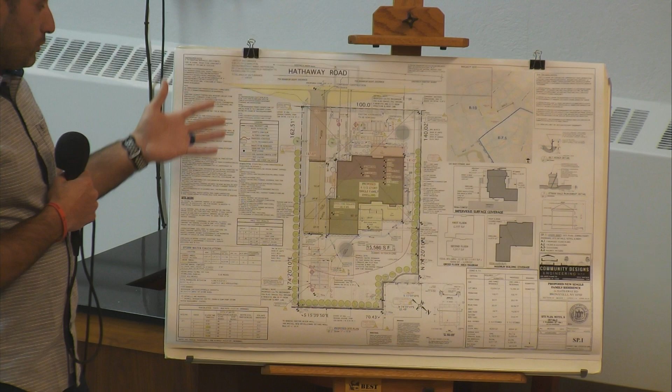There was some existing impervious surface removed on that property so it would be completely conforming to the new size of the lot. These homes are situated in the R10 zoning district, but they are oversized, just a little over 15,000 square feet each parcel, and 10 Hewitt is a little bit larger than those. As for the overall design, 26 is in the middle of 10 Hewitt and 28 Hathaway Road. I'll go to the elevation really quick. This home takes on a bit of a modern farmhouse feel, with white HardiePlank siding and white board and batten vertical on the gable in front.

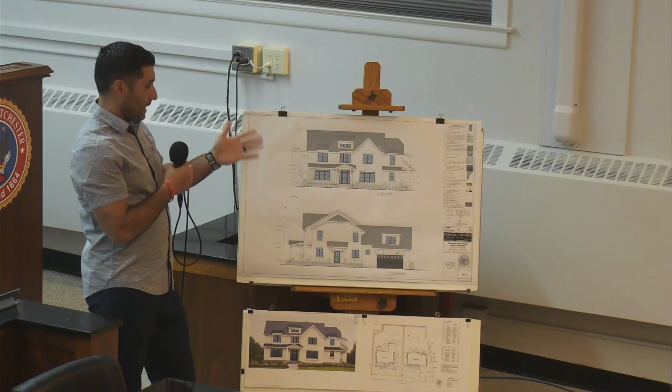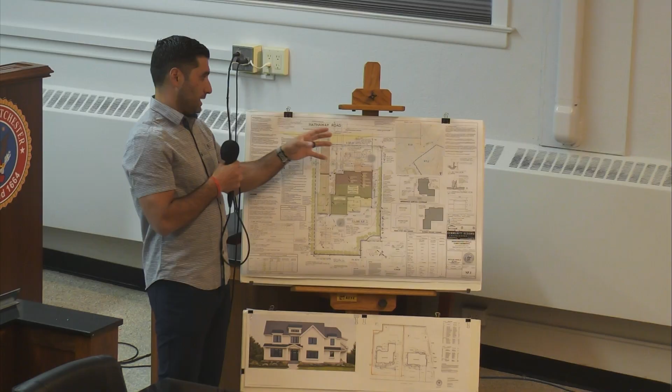In this parcel, because of the oversized lots, we were able to do something more creative. We kept the composition of the house smaller facing Hathaway Road, and shifted the house a bit longer to create a two-car garage on the side. In the middle of the house you enter a one-lane driveway, then turn left to access the garage. This also allows a greater setback from each home: the required side setback is 16 feet, but we're at about 25 feet, so each home has about 40 feet in between, creating good consistency with the streetscape so the homes aren't right up against each other.

Just to go back quickly to the finishes, pretty standard finishes as you see in the area. This one has black Andersen 400 series windows with simulated divided light, which is just a vertical divider. All of the trim is white Azek, and the roof is a pewter gray asphalt shingle roof, with some accent roofing in standing seam metal. The garage and front doors are just as depicted in the elevations.

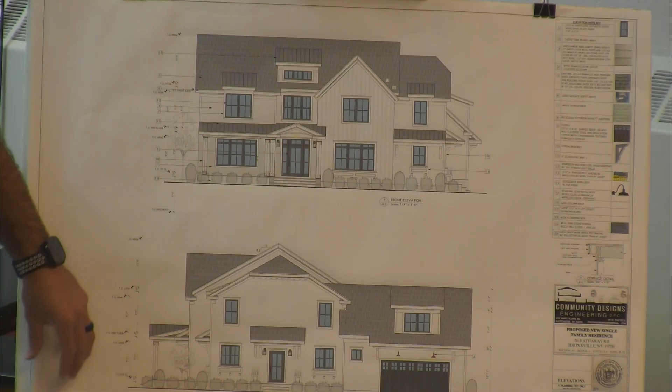As far as the side elevation, this is the left side elevation and the rear of the house. This one does have the garage come back a little bit further and has a little covered patio area with a gas fireplace for people to enjoy, a small outdoor patio, and then also a covered patio.

Back to the site plan - because this was a 3-lot subdivision, there was a whole bunch of other structures: a 3-car garage, a pool, and a pool house. With the subdivision, all of that impervious area was removed. The benefit with this project was that there was no stormwater mitigation previously for those areas, but in this case, all of our new impervious area for this house and the house next door will be captured.

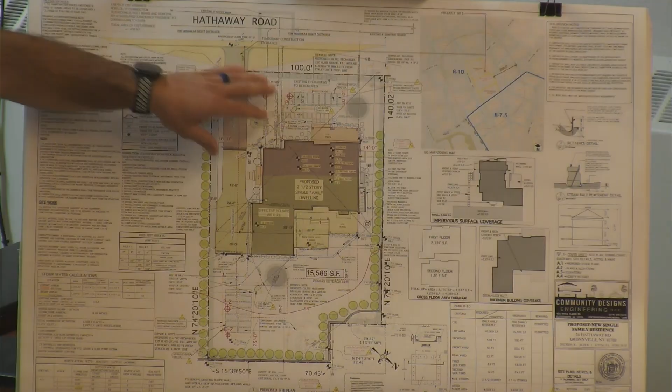We did on-site testing with our consulting engineers, percolation tests and deep tests, and we came up with plenty of room, which is nice too. We have plenty of room and area to fit our 100-year storm in the front and back for this home to mitigate all of the new impervious area.

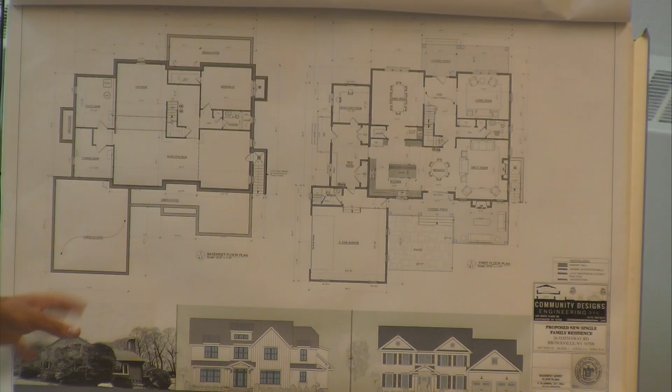As far as the streetscape on this one, this is 10 Hewitt Avenue, the right side elevation of the home - it's just a red brick home. This is our new house in the middle, which is 26, and then to the right is 28 Hathaway Road, which is the next house on the agenda, a typical center hall colonial home to the right of us.

As far as just a little rendering of what this home will look like, and then obviously with new homes there's a full landscape design. It was done by Bob Tramontano. This shows all of the new landscaping around the house, around the foundation, and also on the property lines.

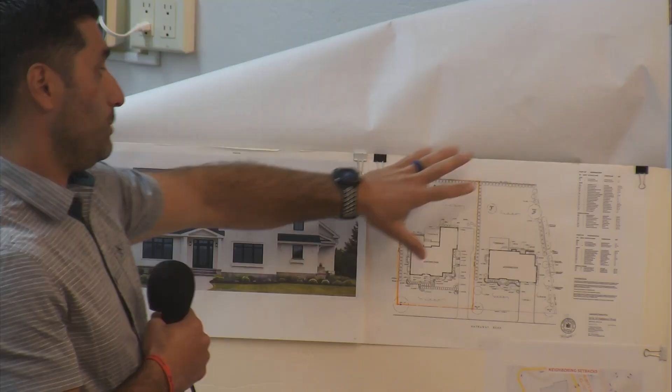There's some evergreen screening. As far as the entire parcel between 26 and 28, there are no trees to be removed. All of the existing trees we are trying to keep, trying to put drainage and everything away from the root system and foundation, so we could keep all the significant trees. The only actual trees being removed - not really trees, but in the front of this parcel there's some evergreens you see here - those are to be removed. Other than that, there's a whole lot of new landscaping that's going to take place around not just the house itself, but the property line.

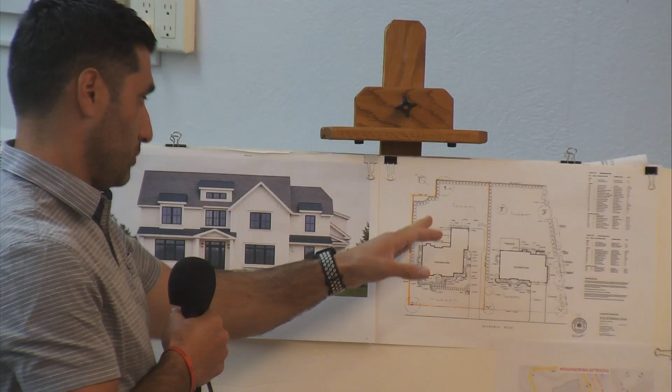In this case too, in the back of the home there is a slight slope of the property. We're going to try to raise the property just a bit, and there's an existing wall that's sort of collapsing, so there's going to be a new interlocking wall along the left side of this property, a little bit as it comes up towards almost the back of the house, and then the entire back property will be a new interlocking wall, about 4 feet max, with evergreen planting above that retaining wall.

We did go to the Architecture Review Board last month. There were no comments other than some neighboring concerns about whether these homes were going to be too close to the property line compared to the other homes next to it. So we did a streetscape study, as submitted in the packet, that shows what the other homes are compared to our homes, and it really does fit in very well.

Just to run down some of the numbers: 32 Hathaway Road has a 36-foot setback, 30 Hathaway Road has a 32-foot setback, and our house is at 37 feet, which is 28 Hathaway. This home is at 38 feet from the property, but the front porch is at the required setback of 30 feet, and the side of 10 Hewitt is at 34. So if you sum up all those numbers, it's very good consistency - one house is not much further than the other, keeping that roadway and those setbacks of the homes very consistent.

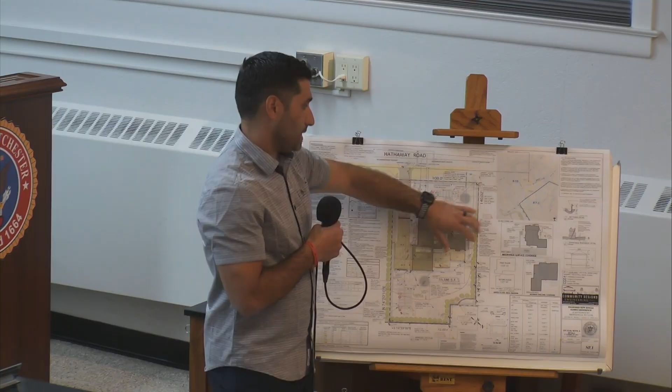When the air conditioning unit is placed, our air conditioning units are facing the new development, not the neighbor. So on this one, it's to the left-hand side, adjacent to 10 Hewitt, and then vice versa.

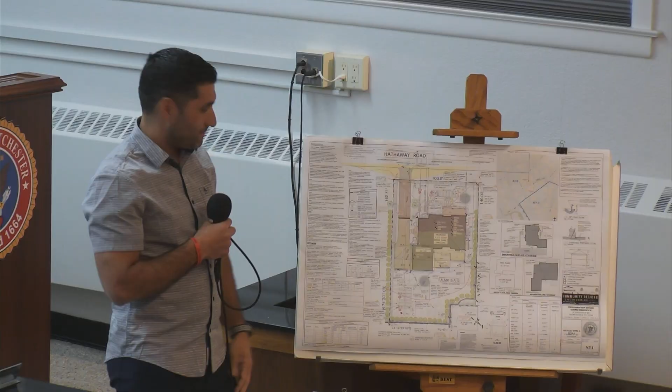You want me to jump into the other one quickly, and then we could do questions? I think it makes sense to do that. It's one subdivided parcel, and I think we'll open and close a public hearing for each application, but there may be some overlap.

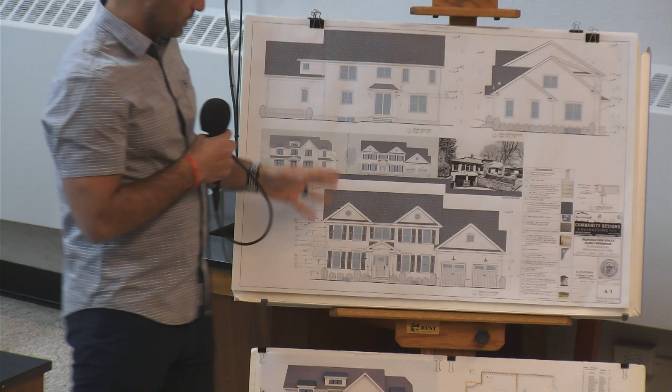So this one is 28 Hathaway Road. Again, as we mentioned, it takes on that Center Hall colonial design, and this one has the garage doors facing the front of Hathaway. As far as finishes, somewhat similar to the other house, but this one we chose to do more traditional materials.

Again, the HardiePlank, but white windows, a 6/1 grill pattern, Andersen 400 series windows. This one has a charcoal color asphalt shingle roof. Pretty basic, nothing jogging out like the other one. Pretty standard garage front door materials. There's a little bit of stone veneer on the portico, the two columns there.

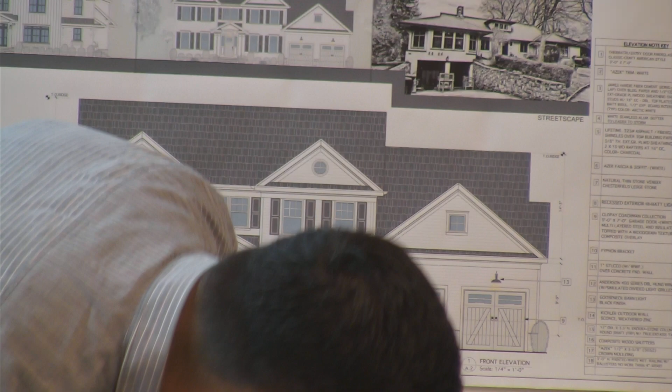Streetscape, again, this is—sorry, what is that one? 30 Hathaway Road, then 28 and 26 next to us. Obviously they're sort of crunched together to fit on the paper, but there's a good 40-foot distance between each home.

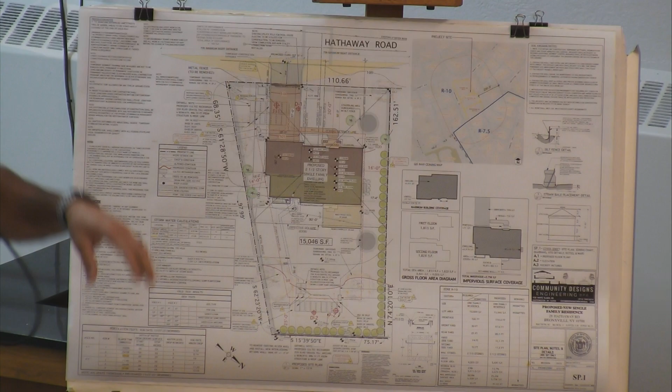As far as the homes—no, I'm talking about 30, not 28. 30, oh, yes, sorry, 30 does have the garage. Either my eyes are lying to me, or that's recessed. 30 does have a garage that goes down. You can see the stone retaining wall here.

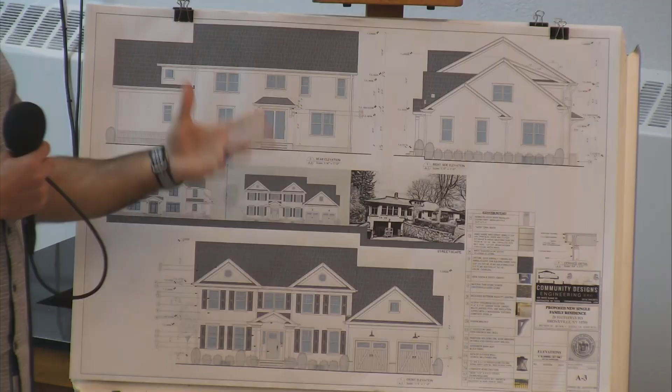Okay, got it. These homes are very, well, there's only about two steps to get into the first floor, so they're set pretty low to the ground, not a whole bunch of steps to get up to them. And overall, given the size of the property, it's a very level piece of property.

Good, and I know you were before the Architectural Review Board. Can you fill us in first on 26, what the ARB had to say, and then 28? Yeah, same for really both, it was just to try to come up with a nice site street setback, to show that the homes are consistent with one another.

Got it, I understand there were questions about that at the ARB meeting. There might have been confusion where maybe they thought the property line is the actual street line. So when you look at the site plan, you see a 30-foot setback, but that just shows where the required setback is—the house is actually at 37. It might seem like it's 37 from the street, but that's not the case because there's a good 14.5-foot buffer. But it's consistent with the other homes on that side of the street.

And was that the ARB's only comment with respect to both of them? Yeah, well more of a neighboring concern, so the ARB wanted to see that—nothing as far as the aesthetics of the home or finishes.

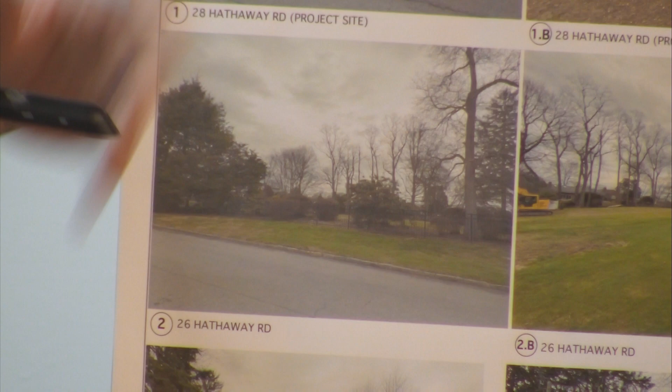So if you see this tree here, all of those trees, if you see on the landscape plan, all of this pine here, that's all to remain. None of the actual significant trees are to be removed. They're all going to remain.

And the smaller, brushier evergreens, are they going to be replaced with other plants? Show us your landscape plan. All of these circles are all of the new plants being replanted. There is a new tree being planted here in between the homes. I think that's a cherry tree.

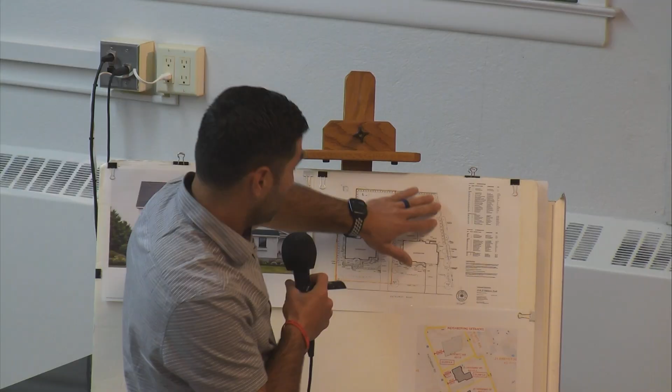And then there are also, between 28 Hathaway and 30 Hathaway, the owner's home, there's another tree—I think a pear tree that's also being planted. And then there's infill, so there's an existing 12-inch tree that will remain, another tree here. All of the trees along the property that divides 28 and 30 will remain, but they're also infilling some hydrangeas, some spruce pines, in between where there's voids of those trees.

Okay, that sounds good to me. A better picture of the... Yeah, so essentially it's a few of the—I think they consider some of these bushes—but it's a few of the plants that are here that are going to be removed.

The good doctor had a question about, which you did mention, raising a small piece of part of the property. Why don't you explain that for us?

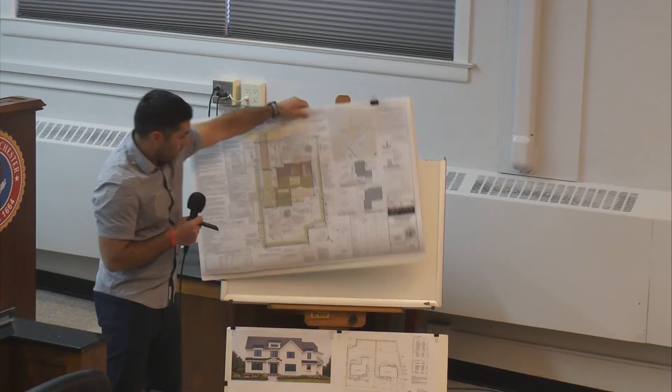That is the back corner of 26. Right here, you see this sort of red contour. So right now, the 28 contour cuts across the house here, and that basically just shifts down here so that where the property sits, it's a little more flat. So essentially, nothing really gets raised—it's only that the 28 contour gets shifted back. There's already a retaining wall at the rear of the property that spans both properties; it's just going to be rebuilt, since it's sort of collapsing and not in good shape. And in any event, your stormwater management plan accounts for exactly this, the sculpting of the property. All of that, yes.

And we were very wise about not putting the Cultec units next to these trees, and keeping them away from the root system. Again, we have plenty of room on the property so that we can do that.

Oh, this is the 12-inch tree on the corner there that you see in the picture, that remains. And I guess really it's these evergreen bushes that are being removed, essentially the only thing that's being removed as far as trees.

Just to talk about the aesthetics of the home and fitting into the character, what's good is these homes are not for a specific buyer, so it's not specific on wanting a modern glass house or something that maybe doesn't fit in. The owner's trying to make these homes appeal to a broad span of people. The people that would buy a home today look for something of this character.

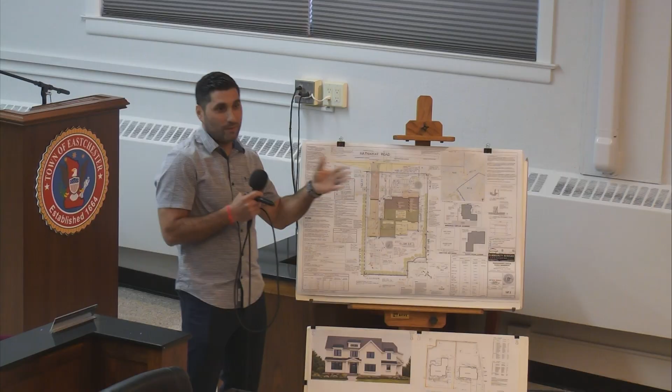Yeah, I understand the concern. But these are also homes being built in 2026, and this is what people want in 2026. They're sizable enough properties that they can hold a house of this size. And massing-wise, these homes are not out of character with some of the other homes in the area.

If you had a uniformity of a certain style of home, and you plunked these ones down right next to it, and they were completely out of character from everything else, I might have a greater consideration. But even then, I know we've permitted very modern houses at the end of a cul-de-sac when none of the neighbors complain.

But it strikes me that these two homes are of their time and place, and I suspect they'll age well because there isn't anything about them that's too esoteric. I don't think it will be a problem 15, 20 years from now. But 15, 20 years from now, they may look like a 2026 house and not a 2046 house. I don't know that there's a solution to that concern, because there isn't a prevailing model of home on this street that we can discern.

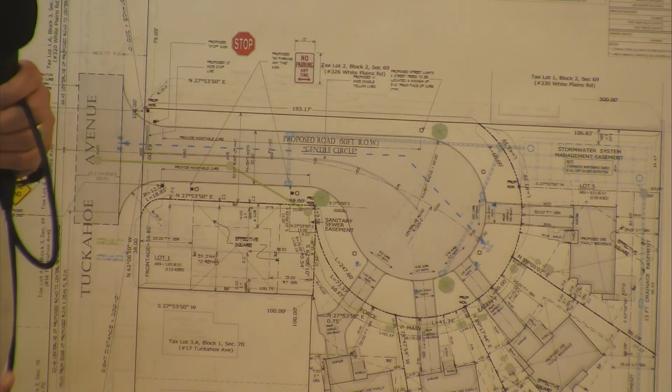A lot of what has been discussed has to do with the stormwater management system. We've made sure the system is large enough to handle the stormwater from the new roadway, and we're developing the overflow structure with the outlet to make sure we release it, because the system is designed as a detention system. So that's the largest item we've been working on.

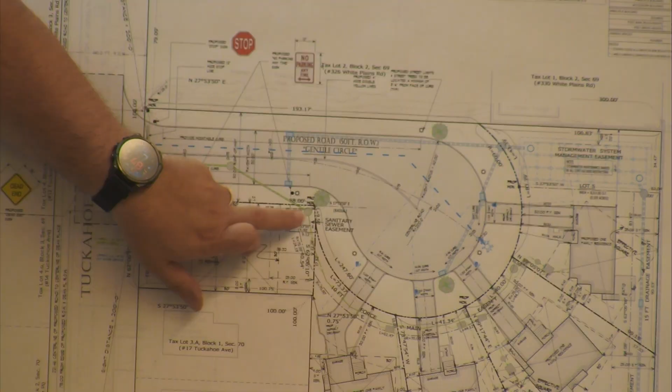As for any other changes, I don't remember if we went over this last time, but now the houses—the sewer main is a force main system up to this dead-end manhole, which is in an easement in lot number 1, and then it'll be gravity fed into Tuckahoe Avenue. We've had the existing sewer system cameraed; everything looked good. We shared it with your consultants and also gave it to DPW, and Rocco said he was fine with it as far as that's concerned.

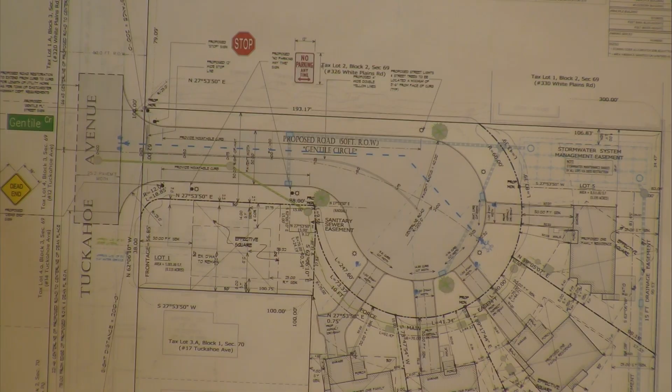Okay, give me a summary. We're proposing 4 new homes that aren't there, plus a road into the facility. There's a lot of impervious surface there. Yes, there's a lot—so currently there's an existing... Wait, let me finish my question.

Oh sorry. If you could summarize for me, where's the water going? Where is all the water going? What's going out to Tuckahoe Avenue to meet up with the sewer main, and what's happening to the water in the back of the property alongside that retaining wall? What's happening in that lower right-hand corner—I think in particular the water that had previously been traversing the adjacent properties on Duluth and Howard Avenue. I know there was a representation some months ago that there were going to be easements running that water through the neighbors' properties and onto either a Joyce Road or Howard Avenue system, and I thought that was now not the case, but it still is, I think, on plan sheet C104.

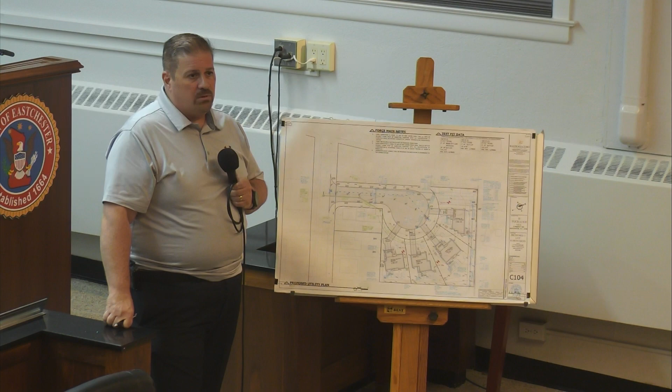Our release of water into that system is lower than what's currently there now. So we're actually making it better because we're putting out less water. How much less, what percentage lower? I'd have to go back through the numbers, but I think it was roughly a 20% reduction—I don't want to quote anything exactly, but it is less than what's there now. Well, you're not making it worse. That's good, but we've got to make it better, not worse.

Everything we've done with this whole subdivision, even as far as grading, we're trying not to affect the neighbors. We're trying to make everybody safe—not even happy, just safe. We don't want any phone calls about somebody getting flooded or having water issues. We're trying to fix everything that's there and build this project so we're actually making it better for the neighborhood and creating value for everybody.

I'm definitely going to have to hear from Mr. Bolander on this, because I understand what the goal is, and I see the water retention on each property as at least a partial fix to the problem, and that's the way it's done. There aren't an infinite number of tricks up your sleeve.

The simple reality is we're taking a largely undeveloped property and developing it quite aggressively—there's quite a bit of impervious surface being created, and it's not the easiest of properties. That shopping center made it a difficult piece, and we've already heard from neighbors about the difficulty with flooding. I won't comment on whether those neighbors should be more interested in making sure a proper, larger, or better pipe is allowed over their properties. I think that was at one point going to be the solution here, and for whatever reason that no longer appears to be the solution.

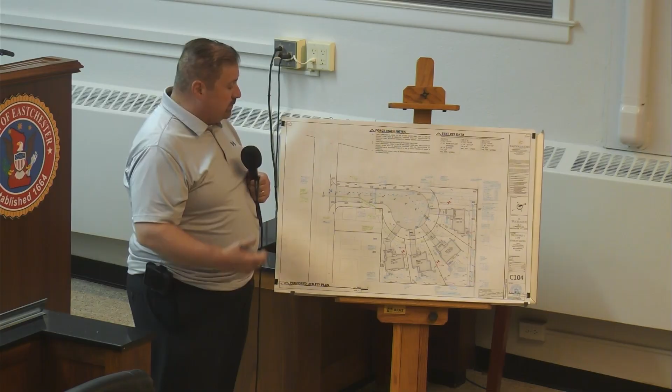A little bit in relation to what you said, the neighboring property at 17 Tuckahoe has always been supportive of our project and of trying to find a fix to upgrade the piping. But the people at the last property that tied into Howard got a little nervous, which you can't blame them, it's their property. That stopped the replacement and upgrading of those pipes, which could have helped relieve even more of the water out there. But everything we're working on together with Rick is making sure that what's going on now will be a reduction of what's currently there, so we don't have any negative impacts on the neighbors.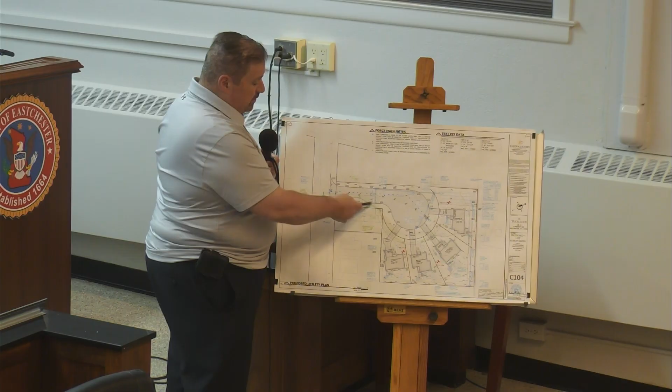Remind me, what if anything is going into the Tuckahoe Avenue town sewage system, the pipes there? Is it just the sanitary sewer? Each of the houses has a sewer ejector pump that pumps up to this manhole and gravitates into the existing sewer. Got it. And it actually dead ends right here, the sewer. So the stormwater is retained on the property?

Right. And we haven't heard anything from the owner of 23 Tuckahoe Avenue either way about this application. I believe three years ago, she's actually the one who alerted us that there were pipes there, the whole history of when the shopping center was built, the flooding condition, and how the town came in and alleviated the flooding. That's how we were able to find all the pipes and all the basins.

All right, again, anything? All right, let's hear from Mr. Bolander. Good evening, Rick Bolander, CJ Consulting.

There has been quite a bit of back and forth finalizing the stormwater design between our office and the applicant, and we have made progress, but it's still not a finished product. We're still working out some kinks, mainly towards the larger system collecting runoff from the driveway in the cul-de-sac. We're comfortable with each lot's system, the soils allow for infiltration, we were out there for the soils testing and they look good. But the larger system is in a fill area, so infiltration isn't allowed, so we had to go to detention. What's left in the design is mainly the outlet control structure, because we're showing the line from the larger system down to the corner of the property to be improved, but that's still going into a system that isn't in the best condition. So the goal is to reduce the flows as much as possible.

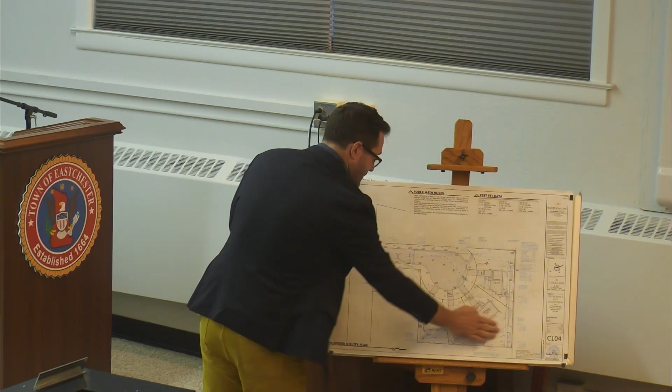Another requirement of ours, to further safeguard the neighbors from water inundation, was a swale along this property line, just to make sure nothing was sheet flowing off-site. It will be collected in a controlled manner and included into the improved system right there. So the swale rises up so the water doesn't flow over? Correct, it'll collect whatever runoff is from these sites and direct it into that system. Again, not a finished product, but we've made progress.

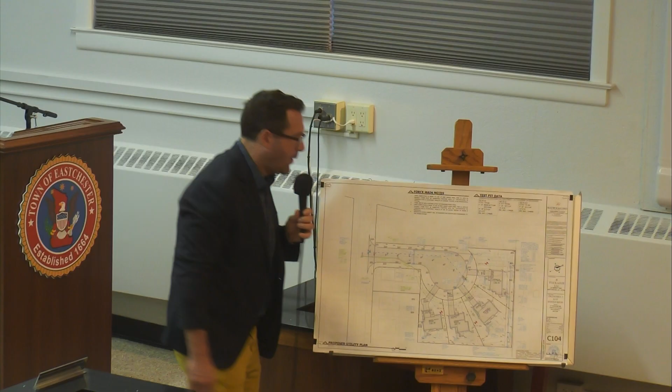Is there underground water flow here though? Groundwater is at 2 to 11 in this area. The bottom of this system is set 2 feet as a New York State requirement, you need 2 feet of separation between the bottom of your system and groundwater, and that's for an infiltration system. Detention, you don't need that separation because you're not worried about water coming back up into the system. So the separation is still there, but because it's in fill soil, infiltration was not allowed.

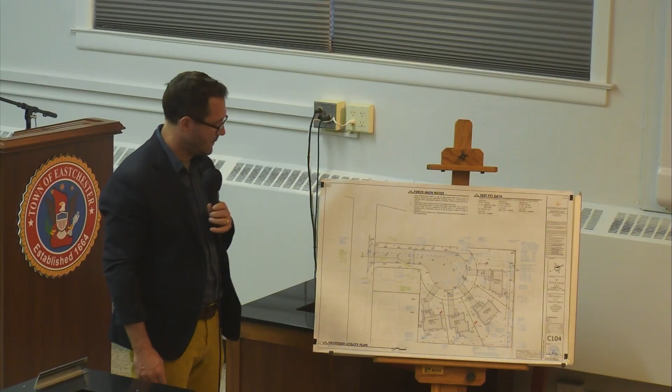So, again, to my question about the pipes along the right side of the rendering here, as best we can tell, these are not in good shape. How are they going to function?

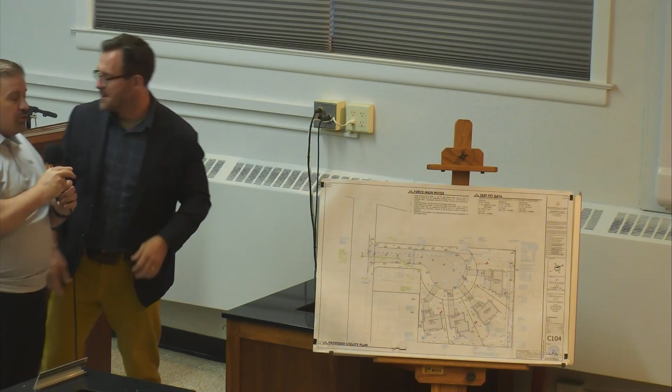Yeah, thanks. So that system, and this was before Rick was on the project, we went out there with Joe Tramelli and Rocco, got the camera. We ran a camera from Howard all the way up. Those pipes are clean and in very good condition.

The stormwater pipes going through those people's lawns, they're in very good condition. We ran, Rocco brought the camera out, we went and looked at it, and they were actually in very good condition. They weren't broken, there was no sign of deterioration, none of that.

They're shallow. That's the only real issue with the system, is they're shallow and the pipes are a little undersized according to code and also practical engineering. But the actual condition of the pipes is very good.

Right, and that's documented someplace? I believe so, yeah, I believe Rocco has all that. I think Joe has a copy of it. Yeah, I think I might have some photographs as well. I'll dig them up and send them over to everybody.

I'm sorry, I didn't want to interrupt, I just wanted to bring that point up. That's fine. How does the size of what you're proposing compare with what's there?

Same size, same size, yes. And I'll confirm the condition of those pipes with the office.

Okay, because I guess I was under the impression from multiple hearings we've had that they were not in the best of condition, and maybe I conflated them being undersized with them being in poor condition, but again, I'd like clarity on that point. And I had that impression as well, but I would like to confirm that now, just to be sure.

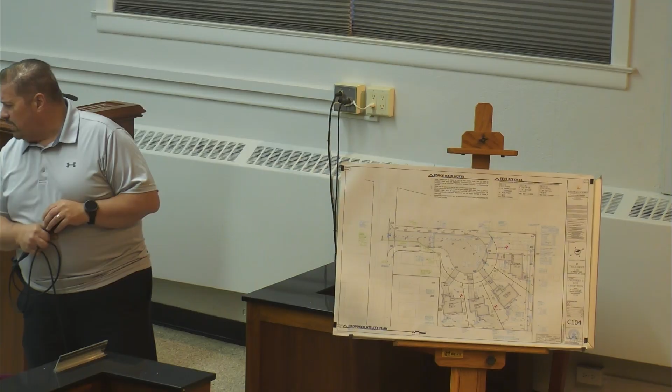Yeah, we can't rely on the contractor to do that, though. An owner has to be responsible for being the point person on that. Basically, that owner's going to then have to pass the hat, right? In terms of cost, yes, that is what has to be worked out - who will be responsible and the mechanism for billing back the other lots.

Is that something, Noel, that we have in other areas of the town? And if so, how do we work around that? Or has it worked? Most often, with subdivisions that have common improvements like this, an HOA will be formed. The HOA will own the improvements, and then it will be responsible for maintenance. Here, the election is not to pursue an HOA, which is okay given a subdivision of this size. It could be hard to fill a board and manage things, but in the absence of that entity there to own and maintain the improvements, there has to be an adequate alternative.

Just out of curiosity, couldn't the town send out a letter saying hey, it's time to check your system? That's not really the town's DPW responsibility - it's going to be the responsibility of these lot owners. No, I know, I'm just thinking out loud. Yeah, it becomes a policing issue again. In terms of enforcement, it definitely is an issue. Enforcement - policing is my word for enforcement.

And it sounds like maintenance is going to be very important, because if I'm understanding it right, the crux of this is going to be how fast water will leave this site, and if it's not maintained properly and it doesn't work exactly as designed, it's going to be a huge issue.

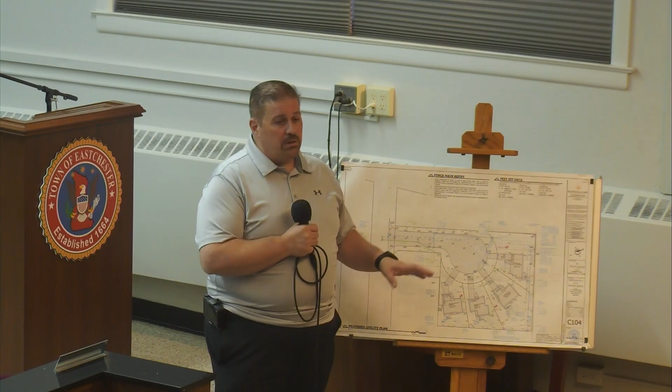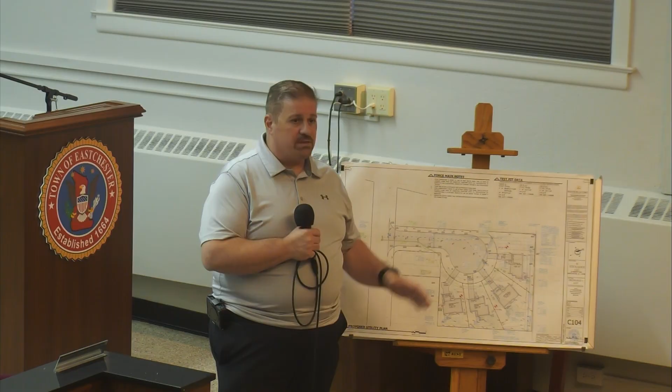However, that stormwater infrastructure is not in good condition. That was one of the long discussions we had with Rocco and with Joe, before Rick. And that whole system has to be fixed. The only other place to tie in was like 1,000 feet down the road on Tuckahoe. So I guess none of those other properties have anything like you were suggesting? I don't know the history of those, so I'd have to go look and see how stormwater was handled and what the regulations for stormwater management were at the time they were developed. Those are dating back to, I think, the 60s when those subdivisions were done, and there was no stormwater laws like we have nowadays.

The country market could... is that the property that was causing this, the country market? Yeah, the shopping center, sorry. Excuse me.

Back to you, Mr. Bolander. What's still outstanding on this? So it's essentially the detailing, the design of this. We've made progress in the last week. Been quite a bit of back and forth, but that still needs to be finalized.

As I mentioned, we're comfortable with each individual lot stormwater mitigation, but it's the driveway and the larger system. I also want confirmation regarding the pipes in the, I guess, northeast corner of the property, the ones that go out into Howard, that those are in fact in reasonably good shape, and despite the fact that they're undersized, that they would in fact perform the function they're being burdened with at the moment. That's an open question that I do need an answer to.

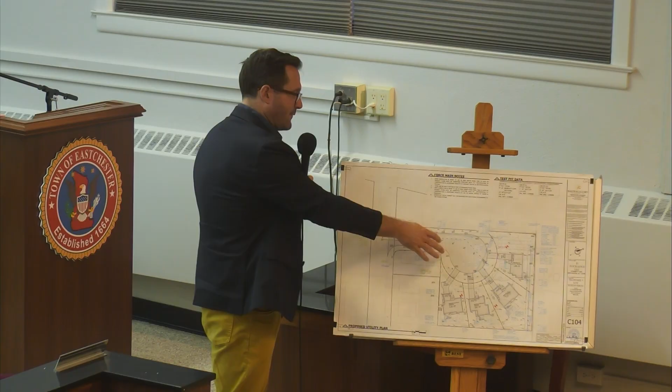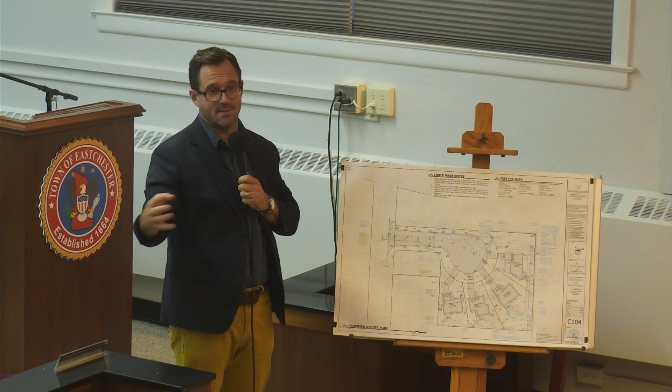Each individual stormwater mitigation system on the lot will use infiltration, so that water will go back into the ground. Because of the location of the larger system that's collecting the driveway and the cul-de-sac, they weren't allowed to infiltrate. So that water is held in that system and slowly released through the improved pipes, which will eventually connect into that system on the neighboring property.

That'll go through to Howard Avenue, correct, but assuming we have a functional system there. Yes. At this point, we don't know how much or at what rate the water is leaving through those pipes. We do not know yet.

And it obviously depends on how heavy the rains we get, and all of it, because if we have a relative dry season, it's not going to be a problem.

So, understanding that it's still in the works, do you believe that so long as the system is large enough, it will create a solution? It just depends on how large that system is for detention. That's to be determined, and that's what we're working through right now. Make a bigger detention tank, or an even bigger detention tank, and eventually you'll get to a solution. It might just be a cost factor for the tank itself.

Correct. And all of the sanitary is going out into Tuckahoe Avenue, just the sanitary. All of the stormwater is being either retained, percolated in the ground, or conveyed towards Howard. That's right, that's right.

So all of it is staying on the property, at least initially, and the detained portion is ideally going to, if it reaches... well, I guess it will always be pushed off of the property onto Howard in an ideal situation. You don't want it just sitting there indefinitely, correct? Absolutely. So we need to make sure that part of the system is functioning.

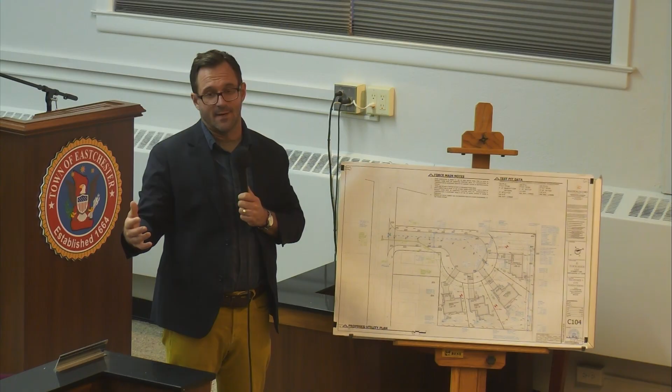And that's another important thing to keep in mind too, not only the maintenance of that system, but the maintenance of the inlets and the pipes as well, because you get a storm on a fall day and those leaves collect on those inlets and essentially render those inlets useless. So that has to be addressed as well. Not only the underground systems, but the above ground system is almost more important than the underground system.

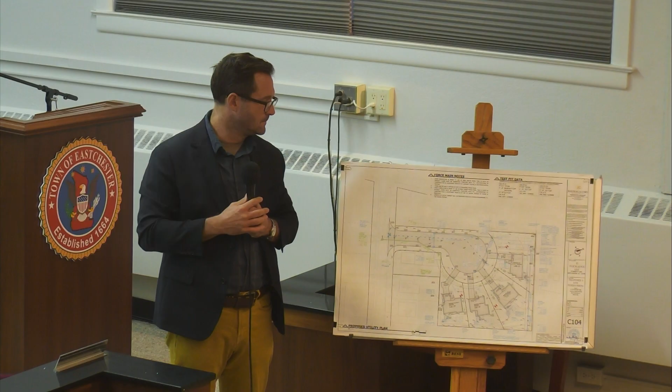And in the ordinary course, who would maintain them? The homeowner, right? But here you have multiple homeowners. Yeah, okay. But that's a very important part of this, the maintenance.

Master Giacomo, do we have any document that memorializes how the owner of the property adjacent to the detention system is going to be responsible, in the first instance, for the costs of maintaining that unit, with the understanding that those costs are supposed to be shared equally by all four owners of the new construction buildings? How is that going to be documented so we're not just working on an honor system?

Well, I believe that's part of the maintenance agreement, that's part of the easement. The maintenance agreement has got to be part of the easement, which is part of the deed of the property, so it's all there. When the title company pulls everything up, they're going to see there's a restriction on the property. What's the restriction? Oh, there's an easement. What is part of it? And it should all tie together. And at what point do we see that?

We would like to have that as soon as possible so we could start to review it. It will have to be submitted for recording when the plat is submitted for filing. So that happens contemporaneously, but the sooner we could start reviewing that information so we could understand the maintenance, the better. I believe you and Jacob have reviewed it already.

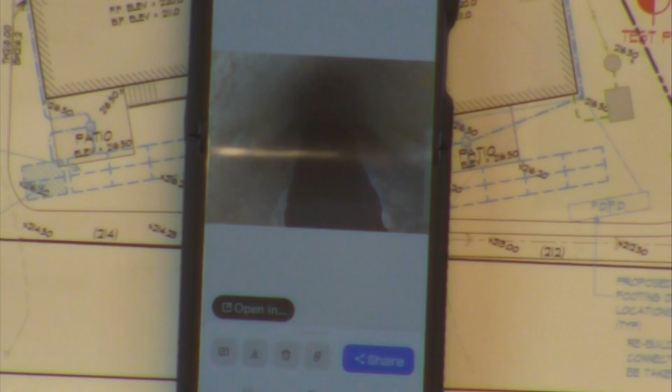We're going to hold the public hearing now. Right, the public hearing is open, so we'll keep it open to public comment. We already have the public hearing open, but I make a motion to hear from the public. Second. All in favor? Aye. Anyone here to comment on application 21-1715 Tuckahoe Avenue subdivision? Not hearing anyone. All right, we're going to keep this open.

But I guess, what was the original objective, since this is still an application for preliminary subdivision? Obviously, there's still open items related to it, so what's the objective that you guys are looking to? We're looking to try to move this along. I know there's a little bit more to do with Rick, I think we're very close, as Rick said. And then we want to try to start getting to the health department to get their blessing on everything. Got it. Because we can't come back to you to get final or anything like that without the health department reviewing it. That's right.

I've had a lot of conversations with Veolia Water. They seem okay with everything. They actually upgraded the water line on Tuckahoe Avenue, and it's actually on our side of the street, so we don't have to cross the street to tie in. Makes it easier for us. As far as the sewer, again, it's been TV'd, and we've spoken to Rocco at DPW, and he's okay with everything. So we kind of have everybody other than the county saying you're good. And of course, with Rick, we just have those little things.

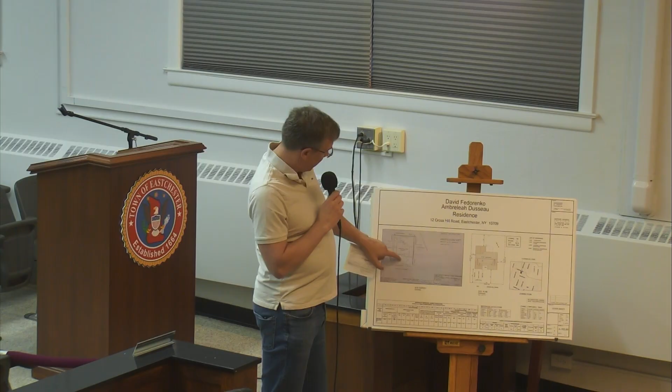That being said, with the site plan, there's not going to be any changes, and no variances required. We're going to stay within the same footprint of the current site. You can see here in red, essentially the two dormers versus what's going to happen in front — it's just a pop out here, keeping it straight. There was already a bathroom on this side that was never finished. It was approved in plans in 1999, says future bathroom, but it's already plumbed and electric and ready to go. So that's essentially good for us, it's less work on our end.

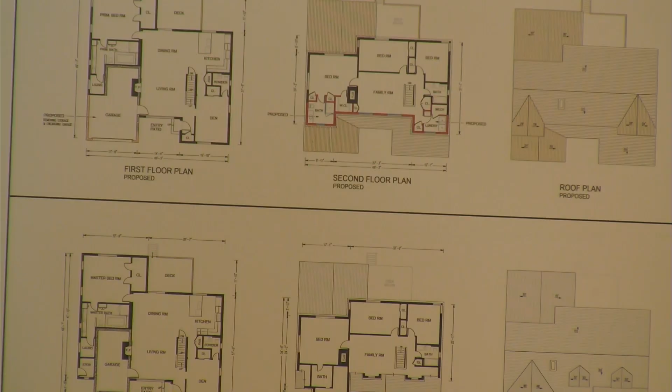As far as the house goes, this is the current elevation — small garage door, two dormers. Essentially, we're going to widen the garage door, put two large windows in the front. This would be something like a family room on the second floor, and then there'll be a laundry over here, and then again, that's the bathroom we talked about. The sides and the back are not even an issue here. I don't like how the rendering looks, but it's going to look better in person.

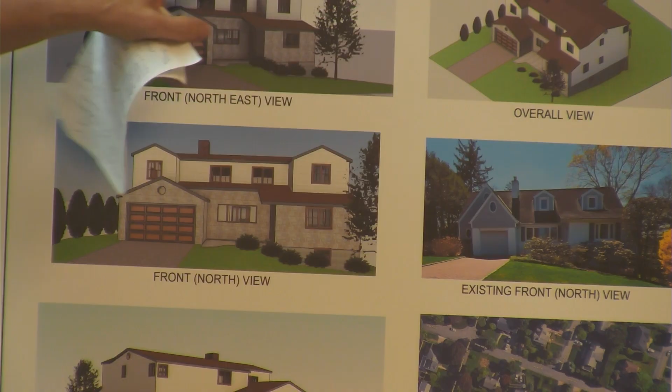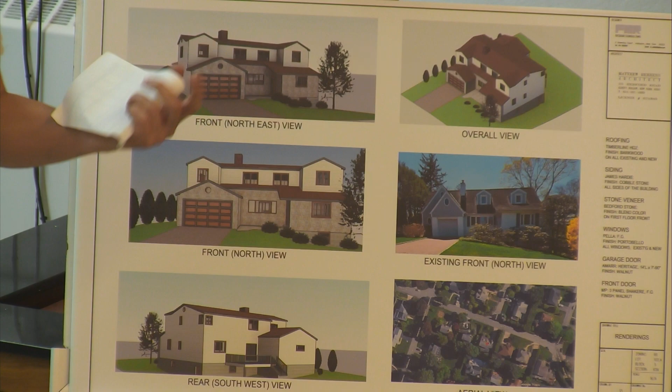That's the current house there. The roof is extremely old. I got to meet some of the neighbors, my neighbor to the west. They've been there for over 35 years, and they said the siding's never been changed on the house. The roof itself is also leaking, so when we had that rain, we had to put a bucket underneath. We're working on a permit currently for interior work, and this will be an amendment to that job.

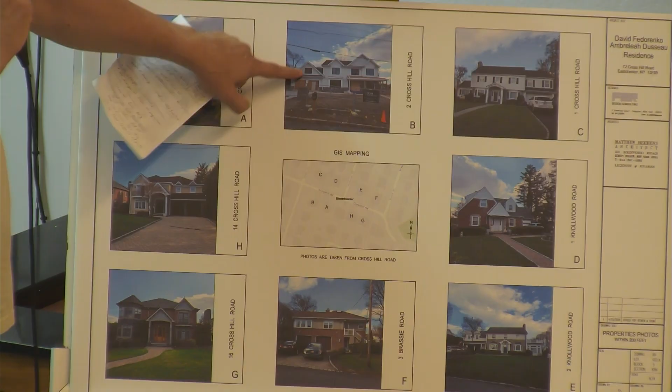And then to current homes in the neighborhood, where are we? We're right here, and then under construction 2 doors down is a much larger home. Our home will be similar to this type of front, so 2 Knollwood and 1 Cross Hill.

We're using standard Pella Lifestyle windows, all casement with grills in the front. Cobblestone colored Hardie siding with Monterey taupe type trims, different variations of 6 and 4 inch. And the GAF Barkwood shingles and Bedford stone veneer in the Liberty style for that.

The good news is, since it needs a lot of love, it's going to be fully undressed, and we're going to put new house wrap and 1 inch insulation board to add an R value of 6. And the doors and garage will be more of a walnut type color to give a little contrast.

Again, there's no variances needed for this particular job, and no changes to the stormwater system at all—it's all existing. No changes for the setbacks, and we're not removing any trees or vegetation.

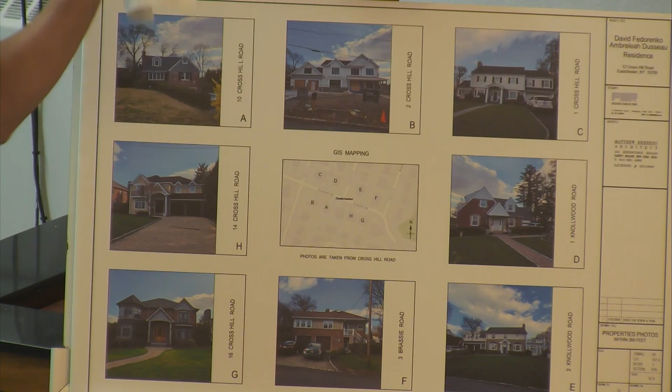Everything stays as is. And we did have a comment from the ARB last time. I think it was more because of how the drawing looked, with all the blacks and grays mixing in. But we're fully aware, and we want casements with grills, which is what they suggested.

Any questions? Just wanted to confirm, I see in the application that the gross floor area, the square footage, has actually gone down from 2336 to 2321. How did you remove 15 square feet?

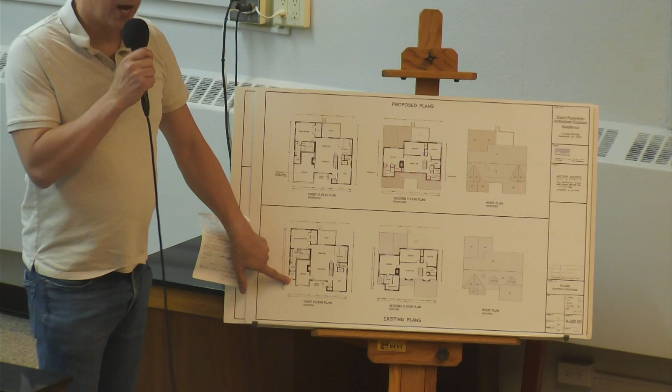Correct. So what happened is, let me see if I can give you a visual. Here's a better picture. This helps. So we lose some square footage. This is the second floor. Here's the first floor, right here where the garage is at, which was very narrow. Here is actually storage connected to the house, and that gets removed because it becomes garage space. Got it, so that's how you end up losing that square footage. Yeah, okay, correct, got it.

But there's no change in impervious surface on the property. Impervious means? Meaning that you're not increasing the amount of concrete or asphalt. Correct, yes. So no additional concrete, in simplest terms. Yes. So you're not losing grass either. Correct.

All right, yeah, and I believe that if what I'm reading is correct, the permitted square footage is actually lower than what they have, but since they were already non-conforming and they're reducing the degree, they don't have to go to the zoning board. Correct. Yeah, okay, that's good.

And the height of the building, the ridge line—no change, remains the same? Yeah. Okay, yeah, this is pretty straightforward.

No, I like it. I think it's a very nice renovation, and one that's going to make life on the second floor a whole lot better, I think. Yes, absolutely. So I have no further questions.

Anyone on the board have questions? Otherwise, I'm going to open it up for a public hearing.

No detention tank, right? I'm sorry? No, I'm just kidding. We were talking about detention tanks, so I just want to make sure we don't have to talk about it here.

Not at all. I will say that the town has recently amended the standards for site plan approval related to stormwater management for all types of lots. It's a minor tweak from what was previously existing, so it's not substantially different, but it is new. So I do have a standard condition moving forward about stormwater management, which I could read into the record at the appropriate time.

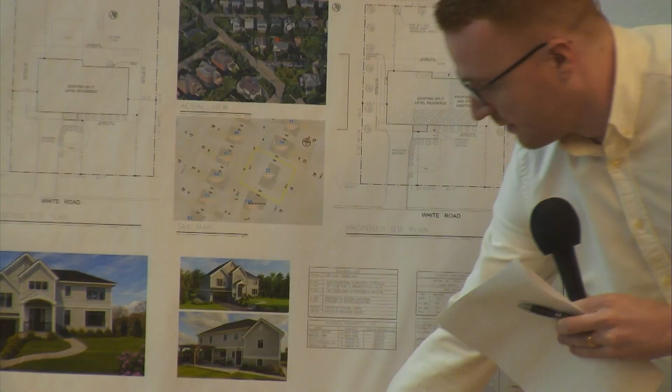The existing house right now has a very low roof on the front and has a partial second floor on the back. As you can see here, I'm going to go through the floor plans a bit.

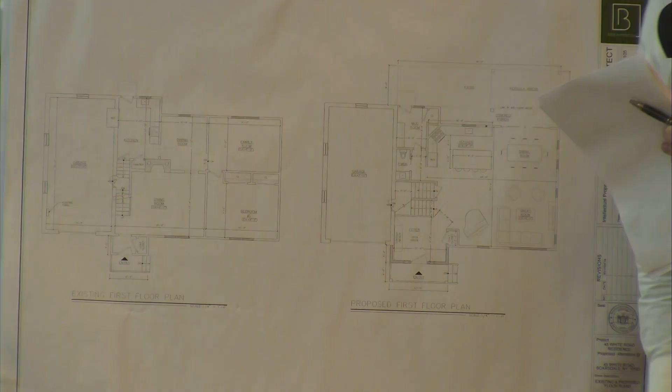On the existing first floor plan, we have a small living room, a typical small kitchen that hasn't been renovated in a very long time, a family room, and one bedroom. The house also has a one-car garage next to it, and we're proposing to open up the whole space on the first floor and put all the bedrooms upstairs.

Over the existing garage right now, we have 2 bedrooms that share 1 bathroom in the middle, but we're proposing to turn that into the primary bedroom, with a spacious walk-in closet and bathroom. We're moving the other 3 bedrooms to the other side, where each bedroom will receive 1 bathroom, and we're also adding a new laundry for the second floor.

We do not have a stair to the attic because we don't really need it. The house also has an existing partial basement, which I'm going to show right now, which also has a bathroom, so we're just going to keep it as is and clean it up and open up the space for it.

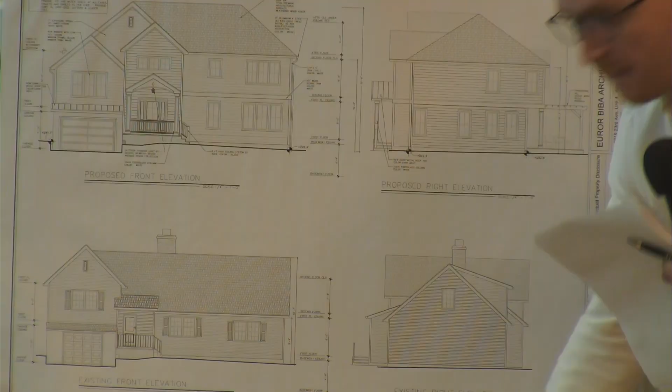I have a question regarding the elevation and the application itself, which goes to the square footage as well. I know my notes for this application indicate that no variance is required, but I'm seeing the gross floor area of the existing is 1718, and the proposed is 2977.

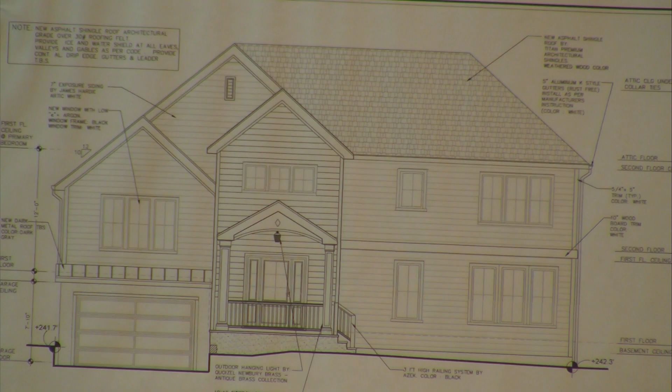I have to say, if this is your handwriting, you gotta go back to school. It could pass as a 9 or a 4. The good news is, I was reading into a problem that doesn't exist, because I was seeing a 9 and it's a 4. So you can disregard that, you're within the limits. I was just curious as to why it was not requiring a variance, and wanted to clarify that.

Speaking of the front elevation here, we're continuing the same roof line on the left side of the house, and following up to create this area, which is where there's going to be the two-story foyer, an open-up space.

For materials, we're going to have architectural shingles in weathered wood, James Hardie siding, black windows with white trim on the outside, and white Azek trim typical. We're also going to have a metal roof, replacing the existing asphalt shingle roof with metal. So that's pretty much it.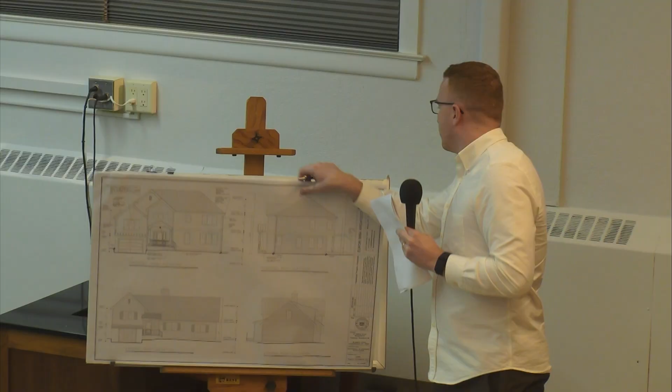Thank you. What was that driveway that we saw before in the before photo? Could you go to the existing photo, I guess I would call it. Yeah, this is the existing driveway.

And what's that in the lower left photo? Well, this is a tree which is hitting the foundation right now, so we're going to remove that tree. We're also providing screening all over the property line, like giant arborvitae, but we definitely need to replace this tree because it's hitting the foundation.

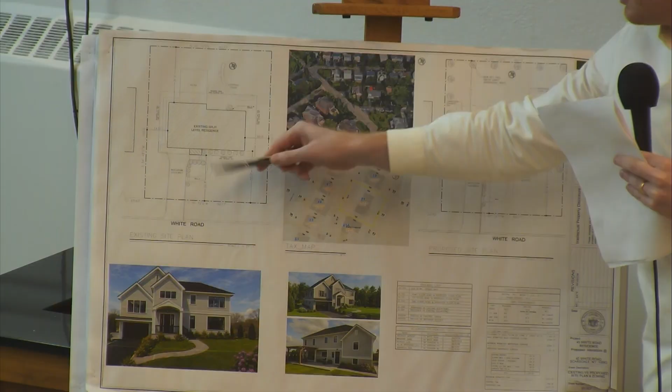Understood. What is in the area down here, again of the four photographs, the one in the lower left quadrant? Is that concrete? Yes, it's concrete that we're basically taking out. This existing portion was like a patio, must have been some sort of fire pit there in the middle, but we're going to relocate it and turn that into green grass, basically.

Got it, okay, because that was sort of a patio, is that what that was? I think so. When I was there, I couldn't tell much. I think it had a fire pit on it from the photos, so it was being used somehow, or there must have been a small tree, but that's the situation I found when I took the photos.

All right, well, we were in front of the architecture review board and did not receive any comments from them. We got one comment from the public, and their question was basically about the left side, asking if we're adding any more windows to what we have right now. So I can show the elevation as well, existing and proposed.

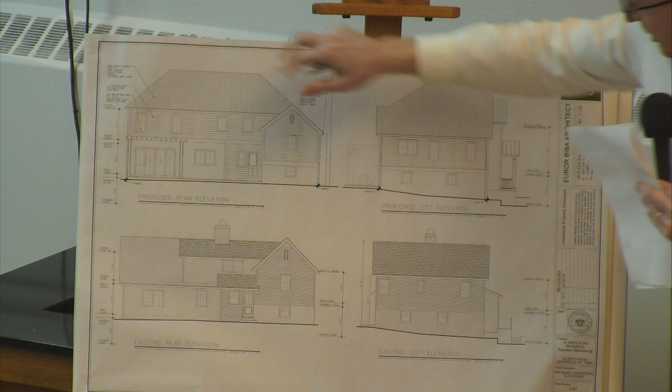So we're talking about this side, the left side, where the neighbor, so the existing, does have 3 windows on the second floor over the garage and 2 windows in the garage. We're basically just relocating the 3 upper windows to fit a bed between the 2 windows. And this is the new master bathroom window, which is pretty much the same window size, just pushing them left and right a little bit to accommodate the new floor plan.

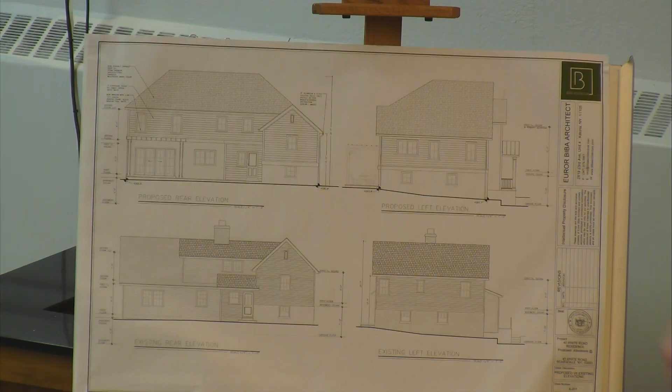Yeah, it's fair, I don't have an issue with that. But other than that, I mean, they were okay. Good, good. Any other questions from this board?

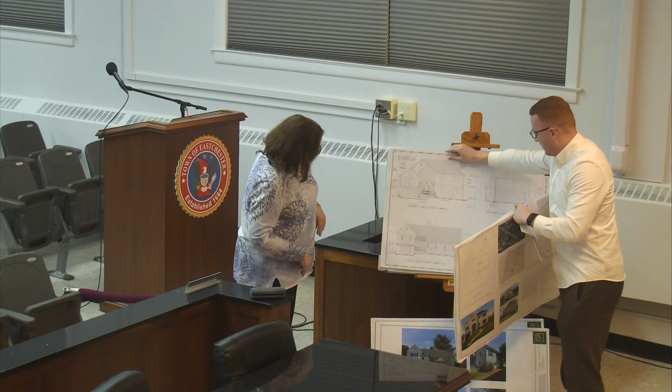So the gable. Just if you could grab the microphone so it all goes on the record. So the height of the roof, our highest point so far is at 30.5 feet, which from the allowed, which is 33, so we're well under the part.

Is it an increase of what the existing is? Just out of, highest point - yes, it is an increase because we're adding a full second floor, so definitely it's an increase, but still within the zoning requirements.

And is this continuous, or is there a separation between the top of this gable? Excuse me ma'am, if you could take the microphone when you're asking a question, because the court reporter is going to want to get this down. Yeah, I just wanted to know if this border to this gable and this gable, are they adjacent?

So what we're trying to do, we're keeping this part. We're obviously going to change the roof and put insulation and everything, maybe new rafters, but we're keeping the same pitch. This is continuing here, and it's going to meet the same pitch on the other side of the house, so we can keep the same look from the front, and that puts us still within the allowable height, building height per zoning.

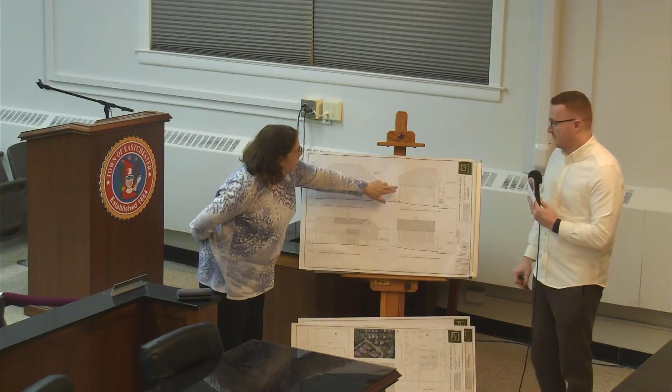Okay, so the windows are going to be in the same area? Same location, same area. And this is where the roof ends now, and then this is going to be the new roof? Exactly, so from here and up is the new roof.

I got it. And are you removing the chimney? I'm sorry? The chimney, are you removing it? We're removing it because, yeah, it's not used well, and it's in the middle of the space.

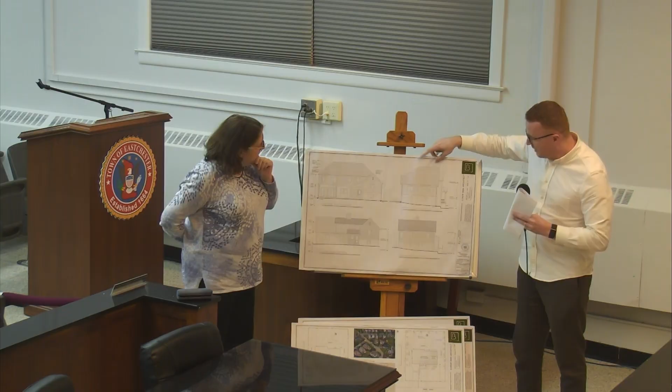If I can show the plan for that. Damn, let's get rid of chimneys. I like chimneys, you like trees. You spoke for the chimneys last.

Yeah, so we are taking out the chimney to create a full open modern floor plan from the inside while maintaining the outside look. You're unquestionably, too, I think you're increasing the height by about 8 feet. I know it's within the allowable, but it is still a significant increase. Yeah, because the front does not - if I go to the photos again, we do not have, it's like super low right now. We don't have a full height. And if I show the neighbor houses, they all have a full second floor. This house is to our left in the corner.

The other houses on the right all have a full second floor. And just for this reason, we're still keeping the pitch low, not to get an attic, which we still could, but we really don't need the space. And even speaking of FAR, we're still like 150 square feet under the area. We're basically just getting what we need for our use.

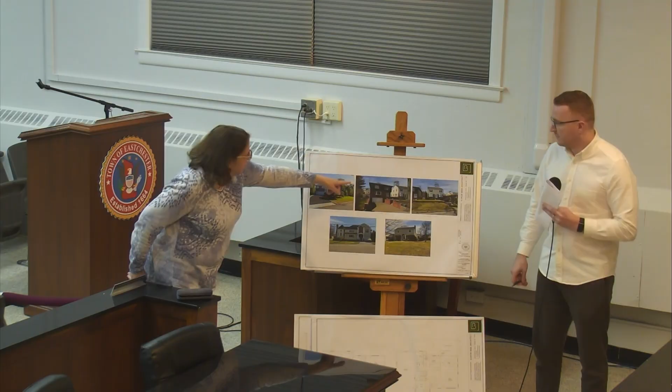No, that's fine. It's helpful to see how it fits in with the other houses in the area. So, is it the same height as the house next door? I think your question was whether it's the same height as the house next door. This has a full story, so I'm guessing we're not changing the ceiling heights and stuff, so it's probably about the same. I didn't measure, to be honest.

And it looks like it's certainly no larger than that house. This is an R7, so it's definitely larger than ours. We're still R5, but 2,400 square feet, a bit up. But that's still within the neighborhood? Yes, but we have an oversized lot. Our lot size is 8,000 square feet versus the 5,000 square feet that most of the lots are next to us. And still, we're maintaining good distances from the side setbacks.

Any other comments from the public on 45 White Road? All right, not hearing any.

I make a motion to close the public hearing on application 26-31, 45 White Road. Second. All in favor? Aye.

Any further questions regarding the application? I would just recommend the same two conditions of a resolution of approval that applied to the previous application. I could read them again or not, whatever is your preference. Read them again. Sure, okay.

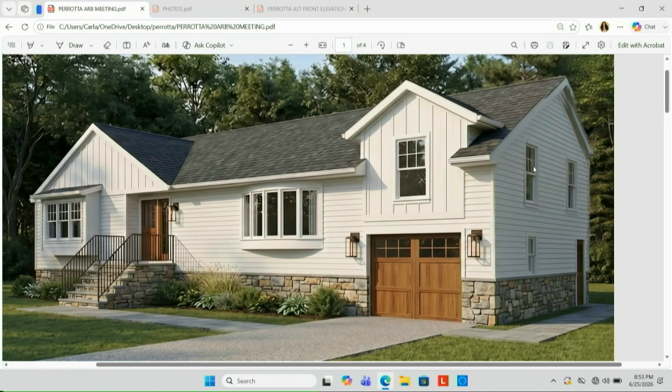Good evening, everybody. Vladimir Levin, architect. This project is an addition on the north and south side of the house.

It required two variances, a side yard variance and an impervious coverage variance, both of which were granted.

The entire house, the exterior is being redone. We're adding a stone water table on the bottom of the house. The entire house is being re-sided with Hardie siding. That's pretty much the project.

Is the height of the house being changed at all? It's not, the main gable is just being continued over to the right side of the property of the house. So everything from the garage door over to the right is an addition. That main roof is being extended, and then there's a dormer being added over the garage door. The gable on the opposite side—currently there's a smaller gable—and we're extending the main roof over to that side, so we're taking off that smaller gable and just adding a larger gable as an architectural feature.

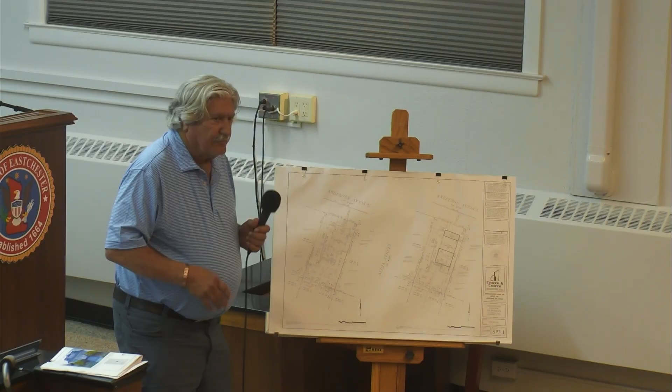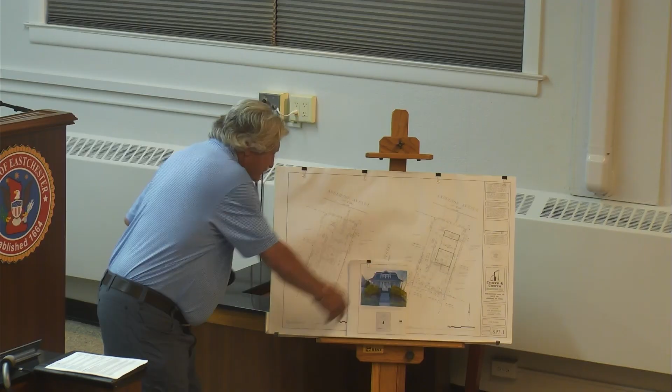I have pictures, did you want to see them? Could you put them up? Sure, let's zoom in. I think you got a lot of bang for your buck here. That's the front, that's the side of the house. That's existing right now, right? Yeah, the very small cottage style.

What's the square footage existing and proposed? The square footage of the interior right now and what it's going to be, it complies with the floor area ratio. We don't exceed the maximum permitted. Also, the height is the same as the existing building originally.

Just taking a look at the application a little more closely, I'm curious as to the numbers. So you're going from 1,393 to 2,294, keeping it just within the 2,300 allowed. Well done.

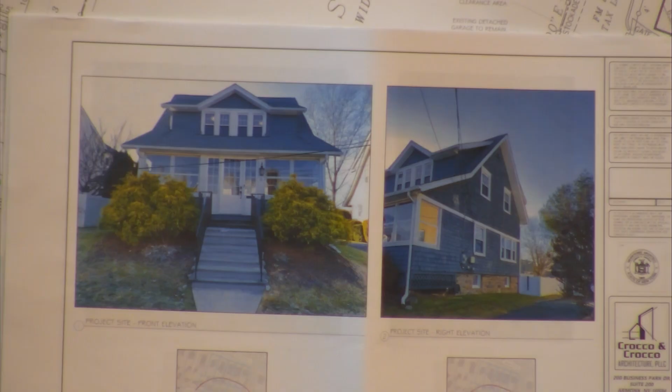I think there's a very noticeable improvement, a really nice job you've done with it. The ARB recommended approval of the application as submitted, correct? Yep, no comment. I really have no further comment myself. Any of my colleagues? Nope.

All right, so let's not waste any time. I make a motion to open the public hearing on application 26-17, 56 Anderson Avenue. Second. All in favor? Aye. Nobody showed up, again no one was hiding after all. I make a motion to close the public hearing on application 26-17, 56 Anderson Avenue. Second. All in favor? Aye.

All right, I think we've come to the reading of conditions. Condition number 1: prior to the issuance of a building permit, the applicant shall provide a stormwater management and erosion control plan acceptable to the Town of Eastchester Building Inspector. That plan must show erosion control measures in accordance with New York State standards and specifications for erosion control dated November 2016, and shall provide stormwater quantity control measures designed to demonstrate zero increase in the peak rate of runoff from the lot in the post-development condition, comparing existing and proposed conditions during all storms through the 100-year storm.

The applicant shall provide proof that all stormwater quantity control measures were properly installed prior to issuance of a certificate of occupancy or compliance. Condition number 2: this approval authorizes the applicant to undertake only the activities specifically depicted on the project plans. Any changes or modifications require amended site plan approval from the planning board. Excellent, thank you, well read.